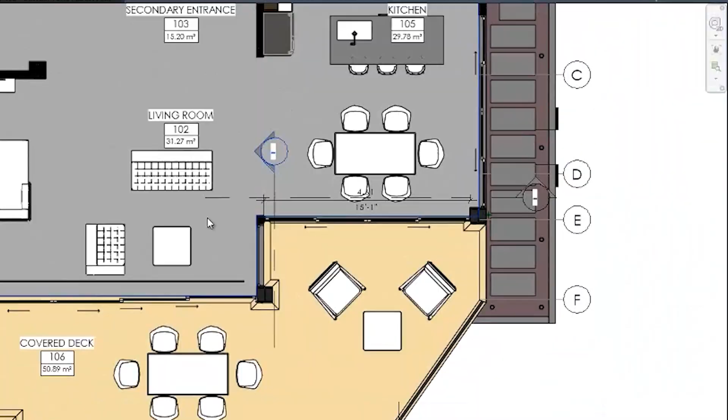At this point, the house works, but now we need to give it character, emotion, textures, colors, the soul of the project. Because, like I said in previous videos, what I sell is not drawings, designs, or 3D models. What I sell is the final experience of living in one of my designs. And remember, finishes are not decoration, finishes are architectural decisions.

This is the step where many people go wrong. They start with tiles, kitchen, and Pinterest images before the volumes, proportion, colors, and light are correct. In my process, finishes come after the client has validated and approved the conceptual proposal, never before. And this is exactly why working with an architect who understands the tropics or the tropical weather saves you money long term.

So once the conceptualization stage is approved, I move directly to the 3D model. In this 3D model, I work with my team in order to create a very detailed 3D model with all the characteristics, the textures, the colors, the proportions, the materials, everything according to my client's vision, necessities, and obviously budget. So let's move to my computer.

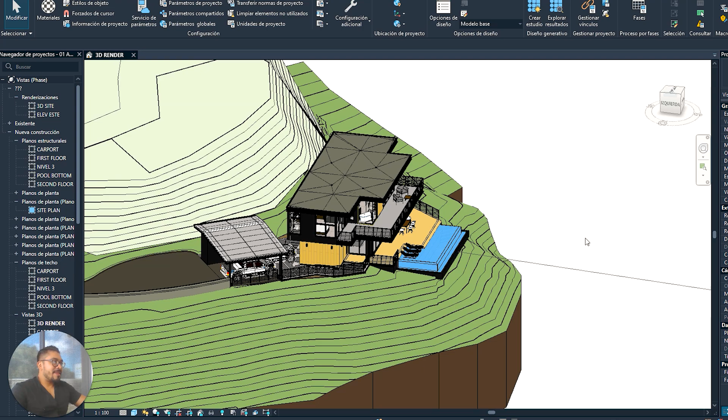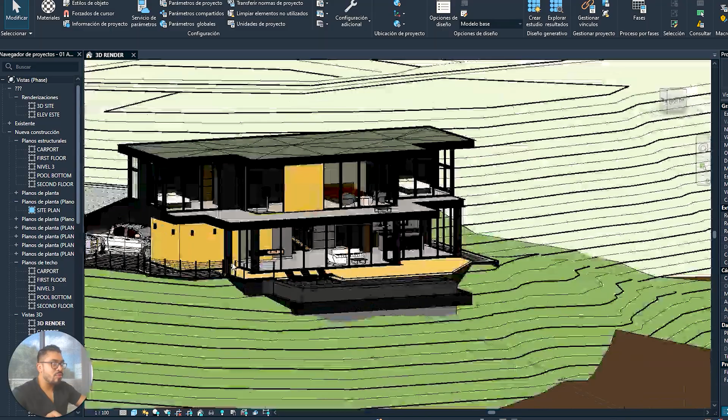Okay guys, this is the final 3D proposal of my project in Pacific Marlin. As you can see, the model is finished. We were working on proportion, obviously. So you can see that the project looks proportional based on the size of the pool, the height of the ceilings, the height of the stories, the carport area, and based on the length of the project.

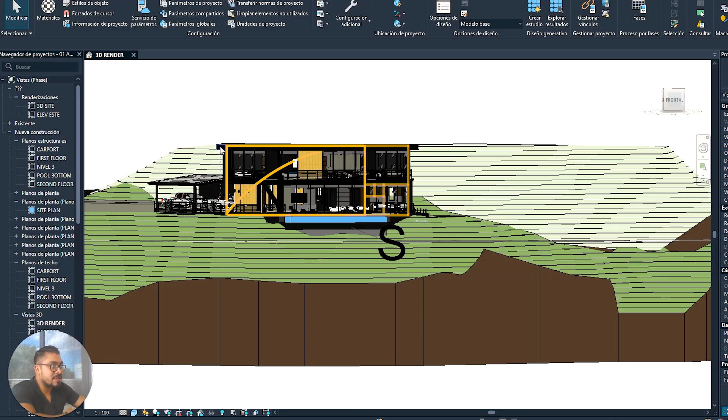To get this proportion, I use the golden ratio. I use a rectangle and this point, the angle or the point of this vertex, and I use the same height. This way, I'm pretty sure that it's going to be proportional for our eyes. The perception of the house is going to feel proportional and comfortable. For that reason, I really love to use the golden ratio. I learned this from architecture school and also from the other legendary architects. So, I'm just applying this to a modern age.

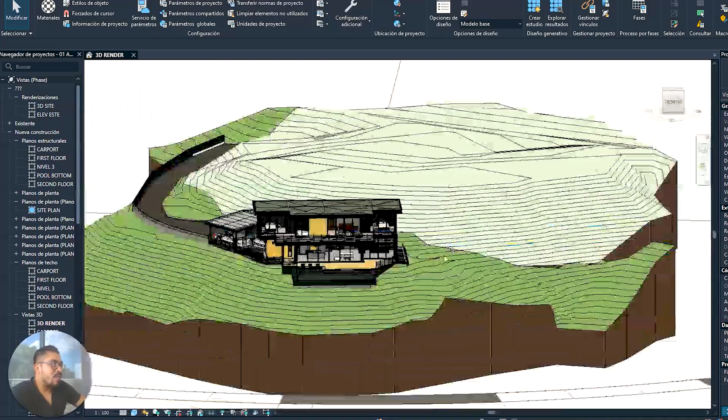I study the shadows as well in this 3D model, the final 3D model. I just turn on the sun exposure, and as you can see, we have a really nice shaded area inside the house. For that reason, I really love to use this tool.

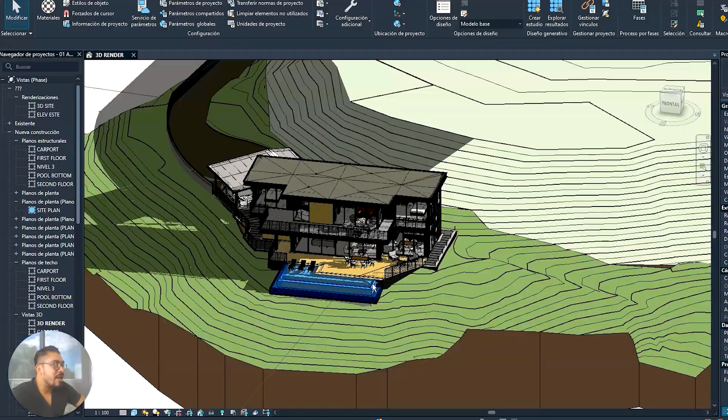I have the exact geographic point, San Juan del Sur, Nicaragua. And in order to have a shaded area most of the time during the day, obviously, when I'm in the sunset hour, approximately 5 p.m. or something like that, we will enjoy still a shaded area, but we will enjoy also the golden hour. That's really amazing. I really love to enjoy the sunset in San Juan del Sur. This is a nice experience that you need to feel.

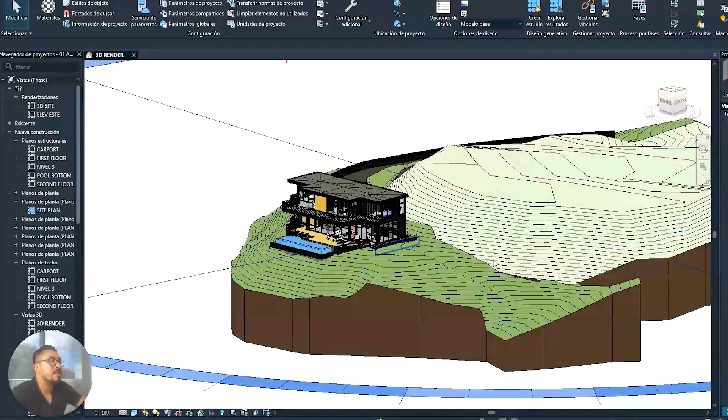For that reason, this is the final 3D model, because based on those calculations, I determined the length of the balcony, which is an overhang at the same time. As you can see, it's a really nice overhang.

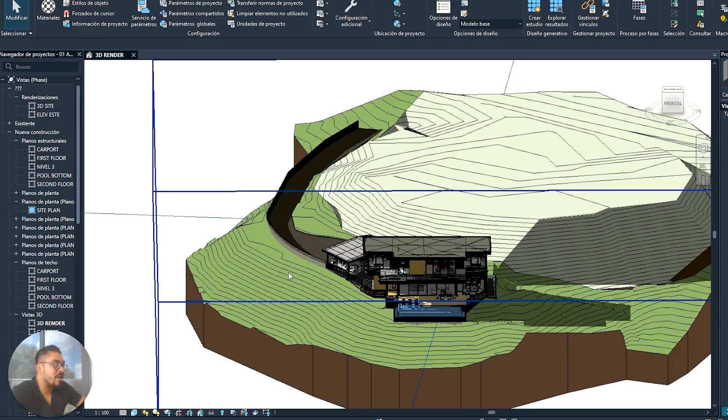Also, I turned off the trees that were here to have a better perspective of the 3D model. But yeah, we have a lot of neem trees over here, which allows you to have a shaded area as well. Please don't cut trees. Use them as an architectural tool as well.

But again, when my clients are enjoying the sunset on the second story, they will see or they will enjoy a really nice view towards the sunset, the golden hour here.

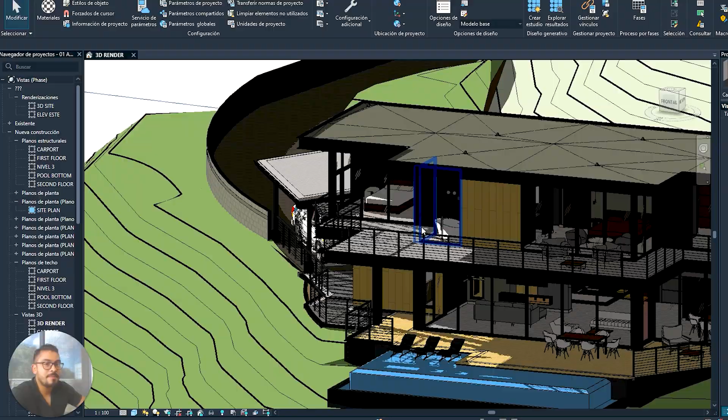Okay, that's really amazing, even if they are using the bathtub area. So I have calculated the exact length of the balcony based on that.

As you know from previous videos, this balcony or deck is pointing directly to the San Juan del Sur Bay, so they can have a really nice sunrise breakfast together. Yeah, that is going to be amazing. I promise you a video on that place once the house is built.

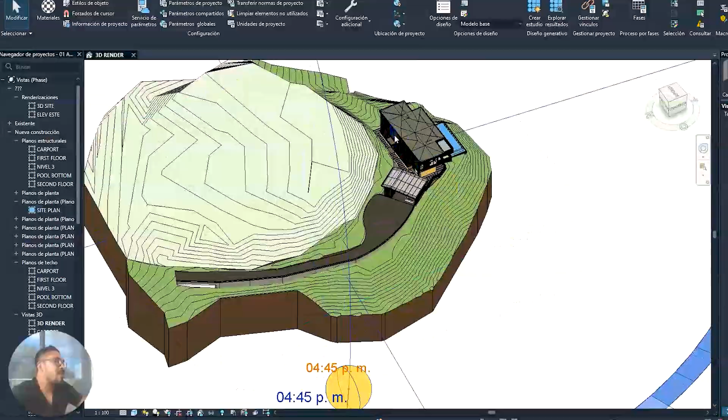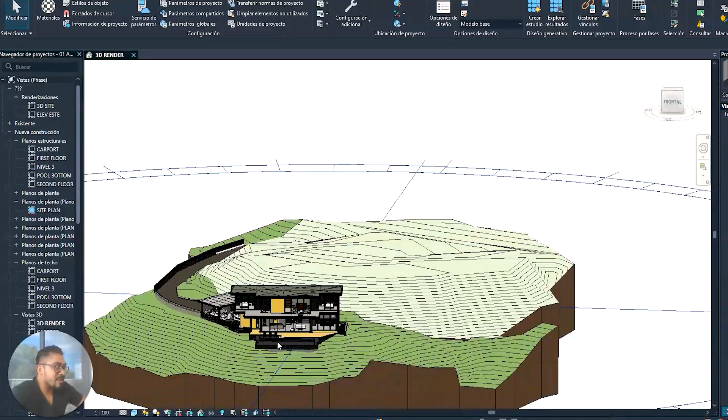As you can see, we have a garden here, an open space, and a mountain in the back. This area is going to provide cross ventilation. The length of the house is in this direction, so the wind coming from this direction will allow a very good cross ventilation using these panoramic doors. That's really important. We also have wind or breeze coming directly from the ocean, and the pool is going to be cooling that air as well. That's a really interesting effect, and we need to take advantage of everything.

Now let's talk about finishes, colors, and textures. As you can see, this is another view of the house. This is a software I use to make renderings for a realistic look, so the client can see in real time how the house is going to look. I really love this software.

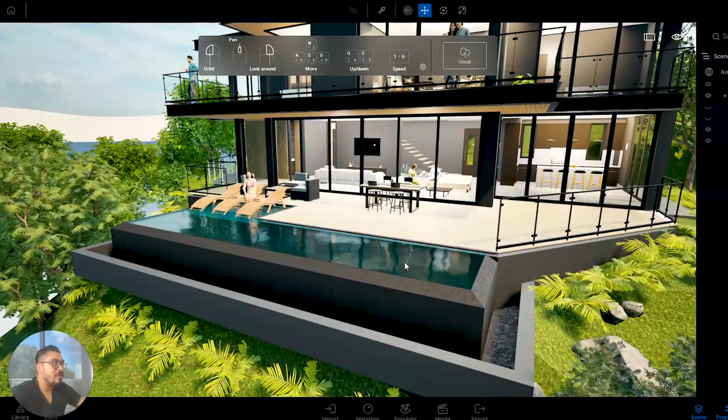So this is an infinity pool. As you can see, we are using a smooth material called Diamond Brite, and I have selected the onyx color, which is a darker color, in order to have a more contemporary look, because this is a contemporary architectural style, and they wanted to avoid white. They wanted to have a different house in that spot of San Juan del Sur.

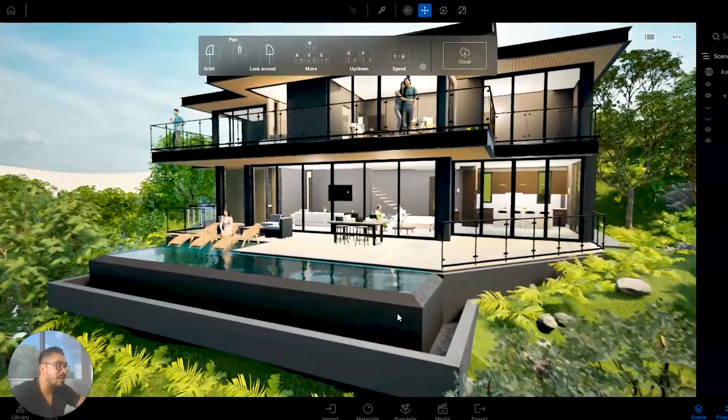So it's a really nice look. This is an infinity pool, like I said, with an infinity effect all around it, like a C shape. So all the water is going to be dropping here in the infinity effect once the pump is turned on, obviously. We are using a gray color paint for the very front of the infinity effect.

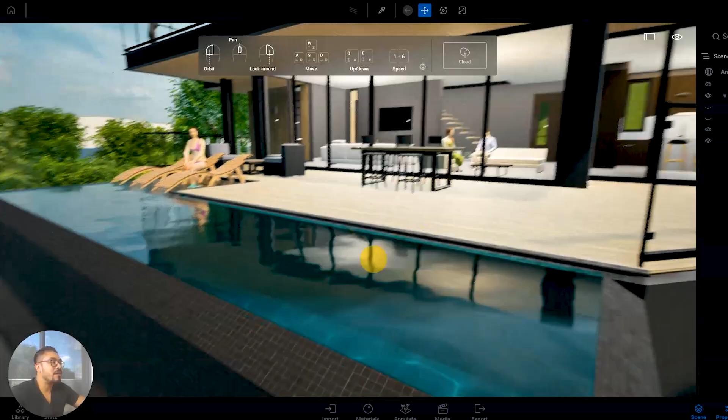As you know, this is monolithic concrete, and the pool itself is the retaining wall of the house. This is going to be a concrete plus rebar wall, and we need to go deeper, maybe 3 or 4 meters, based on the soil study. Everything is onyx, black color. The effect is going to look amazing, and we have 4 feet depth for the swimming area.

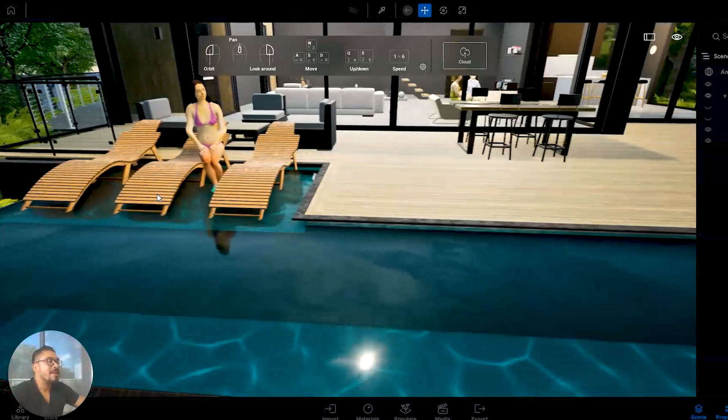Then we have a shallow area to put chairs and enjoy the sun at the same time, because this is the sunbath deck. We don't have a roof in this direction, in this part of the house, just here.

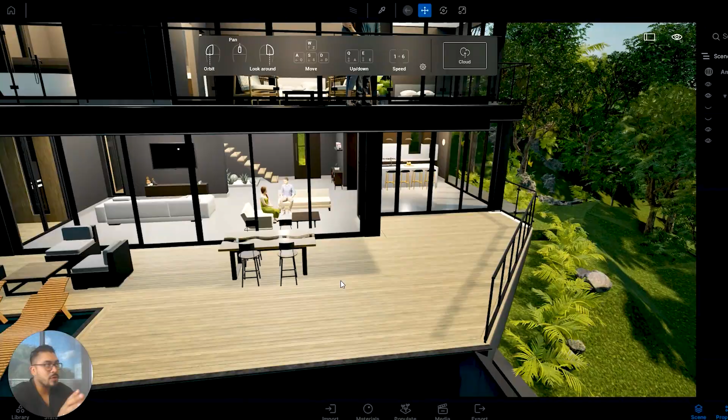Talking about finishes, as you know we have a fixed budget, so I was proposing this fiber cement wooden deck look. It's not wood, it's a fiber cement material with the appearance of wood. So we are saving money and we have the look of wood at the same time. This is cheaper, but it is functional as well.

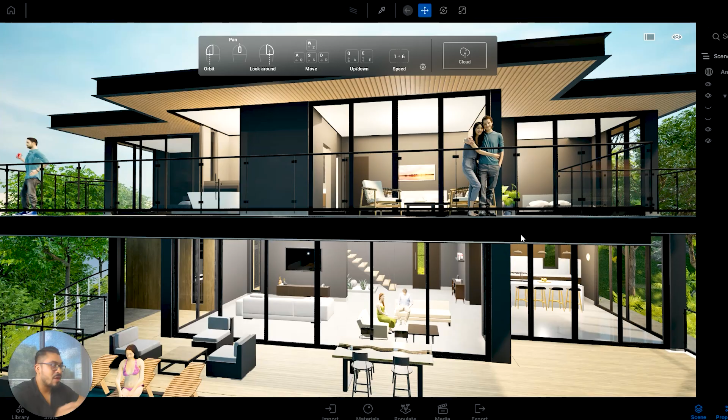We are using this tone to balance and make contrast with the black color, because the PVC sliding doors, the windows, and the fascia, which is a metal fascia, are black, and the interiors use gray tones. So I decided to use a light wooden color for the pool deck.

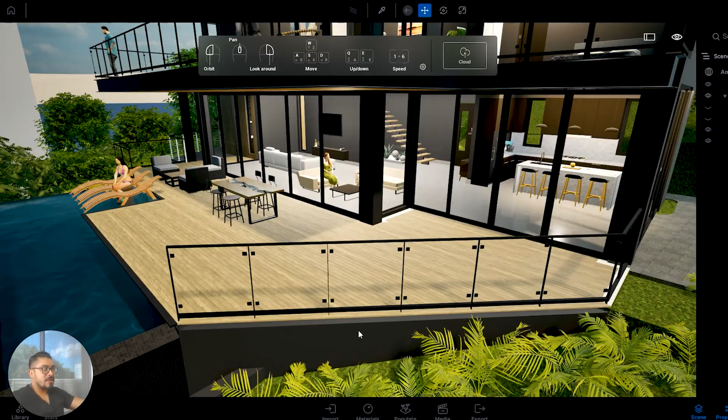All this is a metal structure, and these little retaining walls are cinder blocks with rebar in the middle of the cells, and we are going to pour concrete on it. This way we are using a less expensive retaining wall. Where we need to use 100% a monolithic wall is in this area, because the pool is responsible for it.

You know, the water is really heavy.

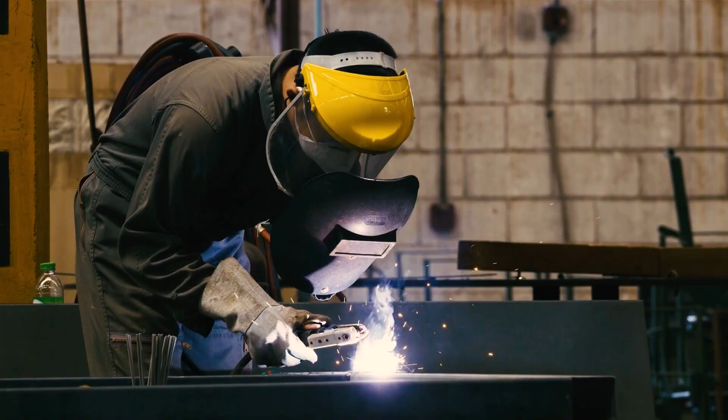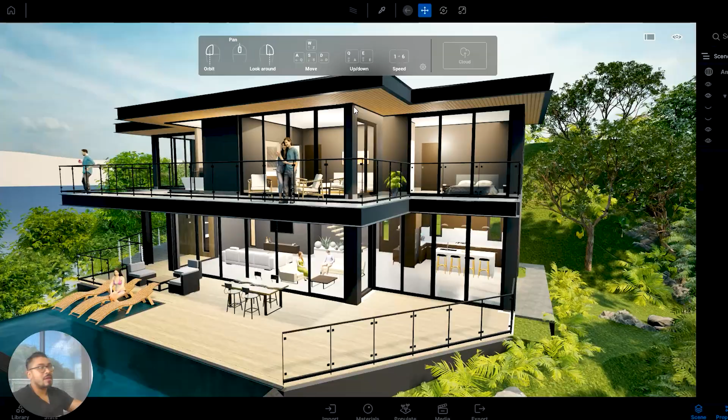Regarding the structure of the house, we are using a metal structure. In the area where we have an important balcony or overhang, we need to use lighter materials, so the very front of the house uses Emmedue, which is nice against heat and also lighter. In the back of the house, we are using cinder block plus concrete structures, because this is the core of the house, which has the most responsible role structurally.

These columns are fake, we can say, because we are using metal columns inside, and we are just using a cover with fiber cement to keep the proportion. We need to take care of the proportions so we don't see a little column over there.

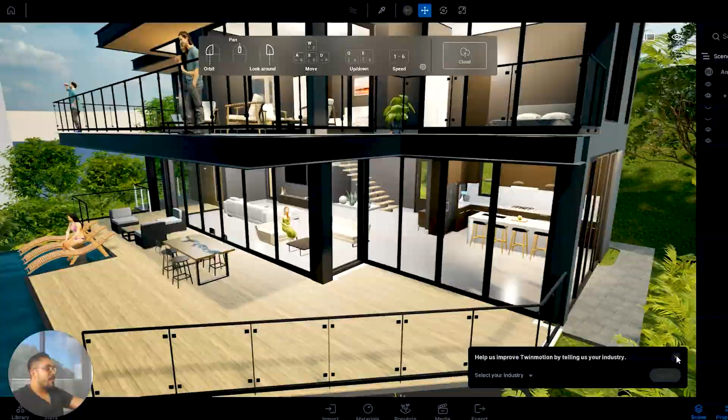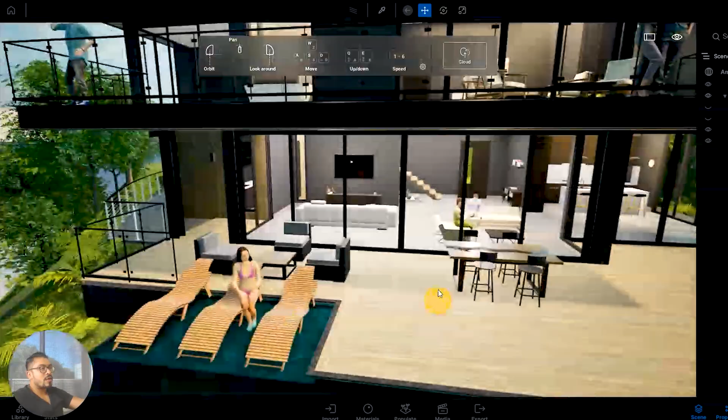In this direction, we have a sidewalk, especially for visitors of my clients, their friends, so they can park their pickups and go directly to the living area using this door, or go to the pool deck, the sunbath zone, or directly to the pool. Meanwhile, they are walking to the house, they enjoy the amazing view from this viewpoint. That experience is really important to me.

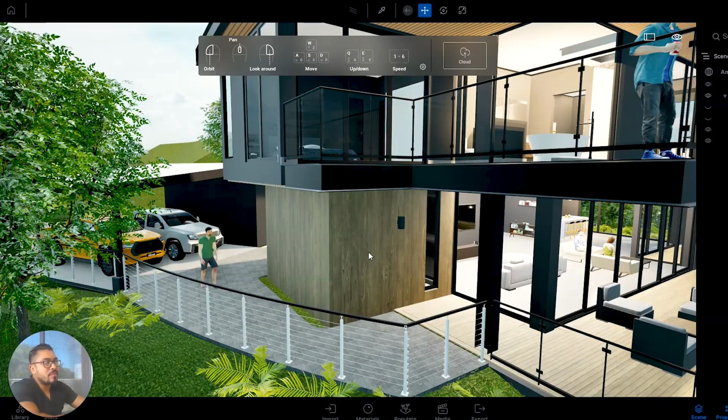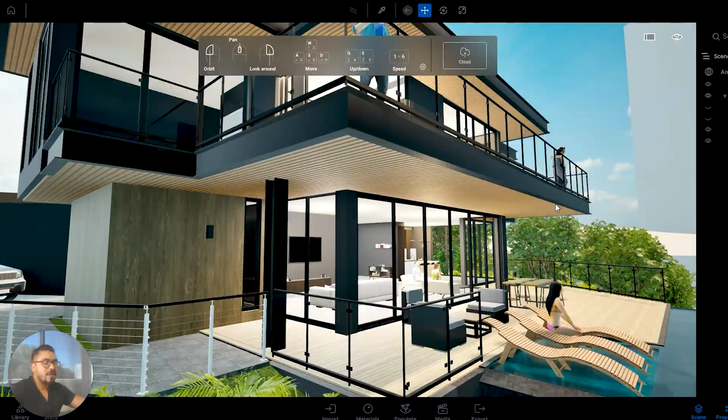For the ceiling, we are using natural wood because we need to balance things. We are using cedar wood and applying the same stain color. We need to create a special maintenance plan to protect this wood every 3 or 6 months, depending on the type of wood. I think cedar can resist 6 months.

We are using a glass railing as well because we need to enjoy the view from everywhere. We have a really nice 270 degree panoramic view towards the ocean, towards San Juan del Sur. This house is designed for a young couple, so it's really open to the nature, to the ocean. They need to feel happiness here.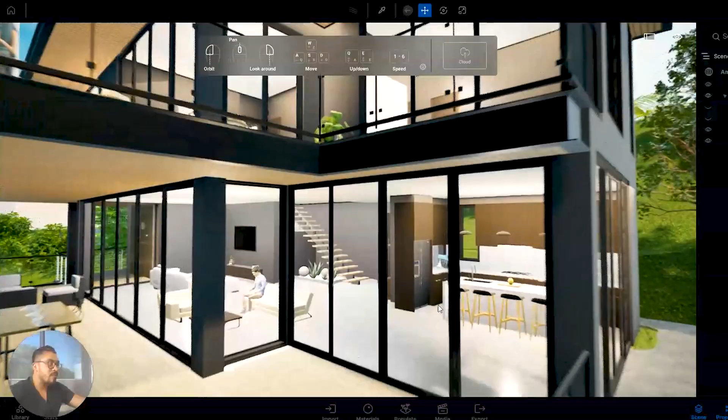Inside the house, we have polished concrete with natural color. This way we are saving money, but at the same time it's a really modern flooring look.

Also, we have the staircase. We are using a metal structure in the middle, metal plates for the steps, and then we are adding the wood on top using screws. This way gives a really nice wooden look while avoiding costly materials.

We decided not to use a glass railing here. We are just using this cable system, because it could be dangerous if you were enjoying wine in town and want to go to the master suite after a really nice night party.

Underneath we have a really nice garden, which is important to keep the natural sense of the project. And over here we have a powder room, a half bath.

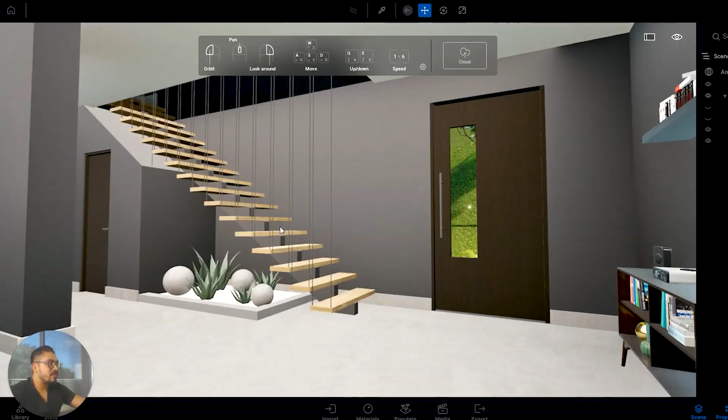For the internal walls, we are using drywall or fiber cement walls, depending if we are in a dry zone or a humid zone. We are using solid wood for all the doors because it's a high-end house. Don't forget that. And then we have here the kitchen.

We have designed a really nice island because they love cooking while enjoying the San Juan del Sur town. We are using countertops, which we can select based on our catalogs. I have a ton of catalogs here in our architectural studio.

I think the best practice is to go with my clients to the finishes store to select everything. I love that part. The emotion of selecting the final finishes of your home is something you need to experience yourself.

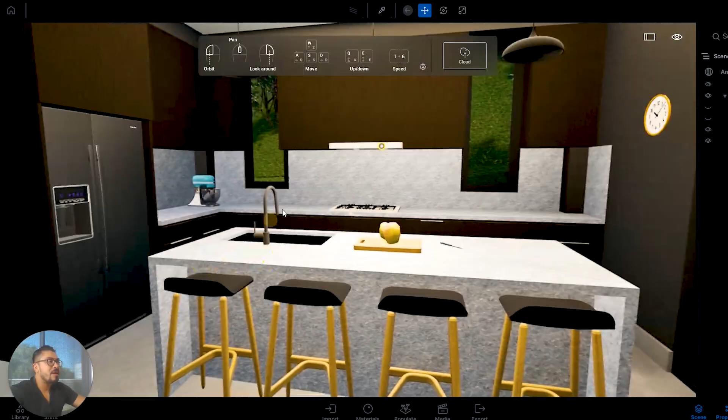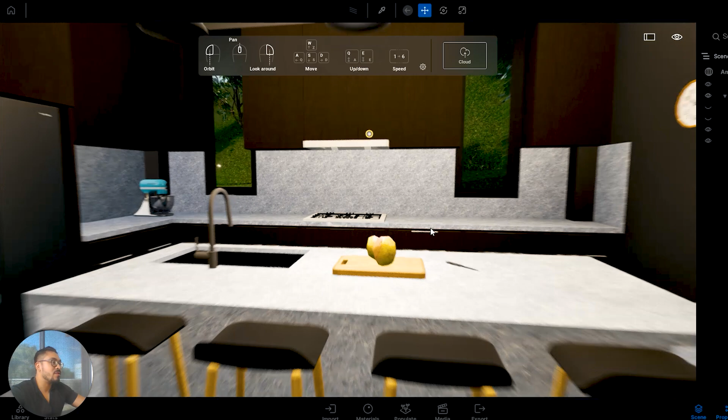So we have a sink area, with the backsplash using the same countertop color. We have a 36 inch fridge, and we're using a darker wood here for the cabinetry, and obviously we have windows. That's very important for good illumination while you're cooking your best plates. We also have a lot of cabinetry, which is really important so you can store all the bowls, plates, spoons, forks, etc.

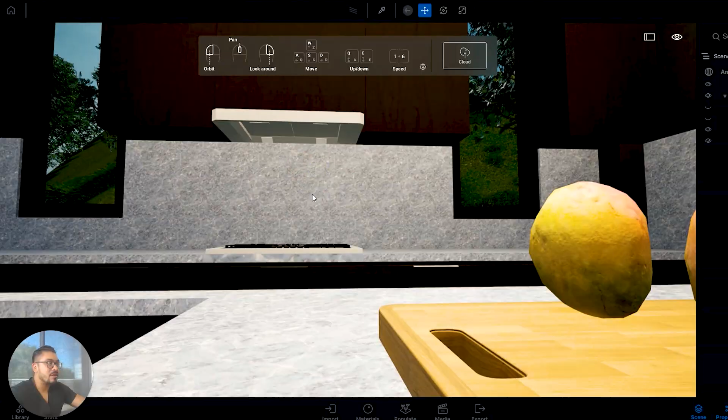Then we have the cooktop, and the hood is hidden, as you can see, because this is a contemporary look, so we need to keep the simplicity as much as possible. We have the ceiling in the interior, which is drywall with white color, and we need to keep a contrast. It's very important, so as you can see, the floor is lighter than the walls, or you can decide to make the walls lighter and the floor darker.

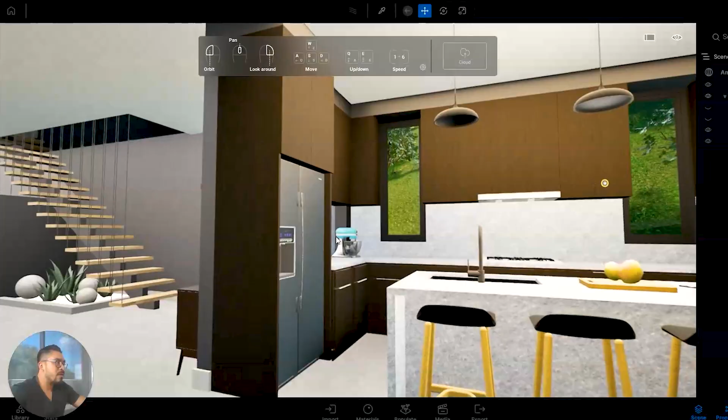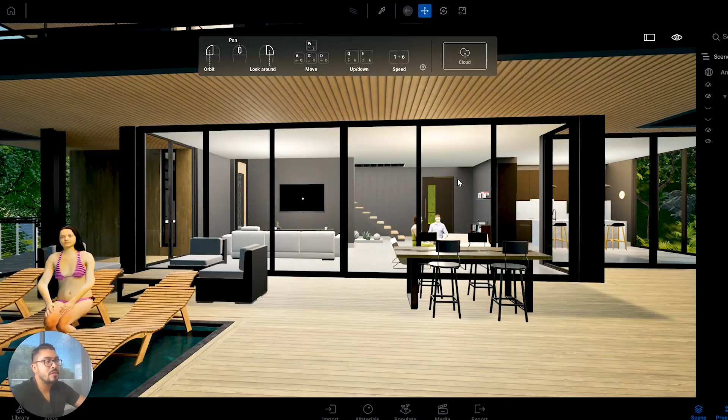That's acceptable as well, but yeah, this is practically the finishes for the living area. We're using a darker wood color as well to make contrast, matching with the color of the doors and the furniture. I love to use floating effect furniture to keep the consistency of the contemporary style. Even the frames of the PVC windows and doors are jet black - that's the code of the black color.

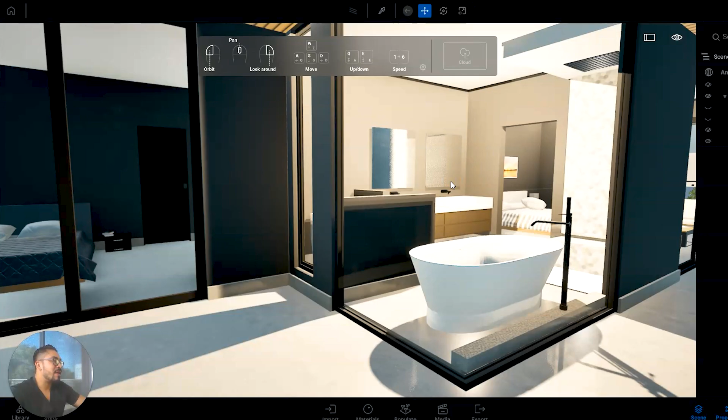So we're using the same color for the interiors of the bedrooms. This is the master suite, this is secondary bedroom number one, and this is secondary bedroom number two, and also the master bathroom area. This is the 3D model.

For the fascia, I'm using a metal fascia to keep the contemporary look, using a special paint against the salt of the ocean. We need to keep a maintenance plan as well - every 6 months we need to apply that special paint.

If we use a metal roof like the zinc, we need to create a slope, and the minimum slope for a metal roof is 10%. So we would need a bigger fascia, which would be incorrect for this type of project. We're keeping the straight lines - that's really, really important.

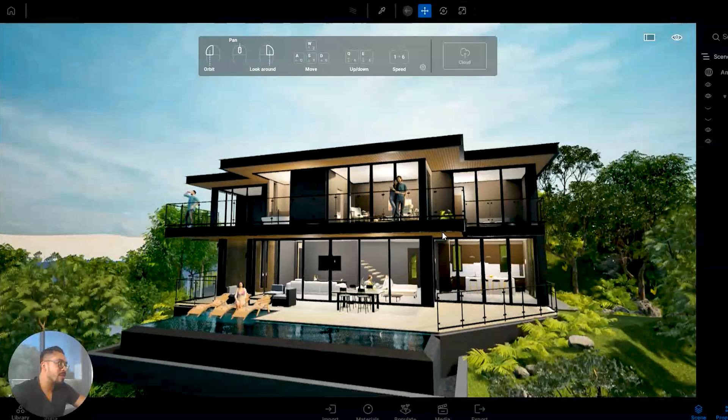But yeah, now let's move to the renderings. We're happy with the 3D modeling, so we move towards the renderings stage. As you can see, these are the final renderings of the house.

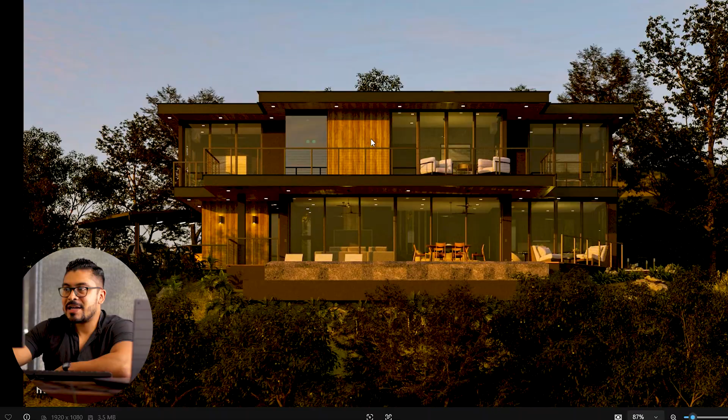We decided to apply the same siding wooden style like this one in the laundry and pantry room. This is really nice because we're balancing the textures. That's very important - I always stay with my team in a designing meeting, comparing and analyzing everything.

Okay, put this color over here. Okay, I don't like it, remove that. And that's my everyday here in the studio with my team - they are amazing, the best dream team ever for architecture.

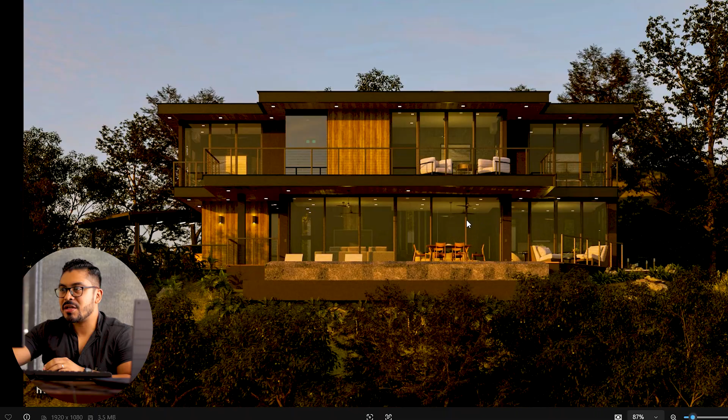So this way we achieve this nice concept, this nice result. As you can see here, we can see the wooden ceiling look - that's really amazing, that's really important for us. And this is the look for the other side of the house.

As you know, on the beach front is where we need to have the best facade, so in the back we can use fewer materials - only the clients are going to see it, so there's no problem if we leave this simpler, I mean the back of the house.

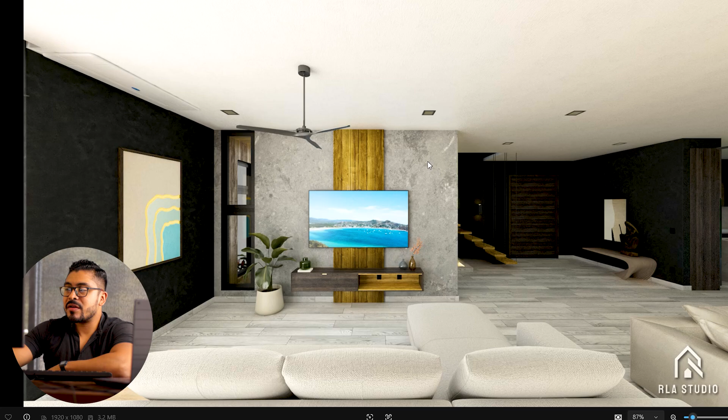This is the final look of the house, and for the interiors, these are the final finishes. As you can see, I made a lot of changes here. We decided to use the same siding look from the exterior to the interior in the middle to have a symmetry, and also we decided to play with the gray tones.

For example, the wall on my left is totally black, and the wall in the middle where the TV is going to be is micro cement, a different color, and also the texture, as you know, is rustic. This looks much better, and also the floating effect furniture is nice, combined with plants and little touches.

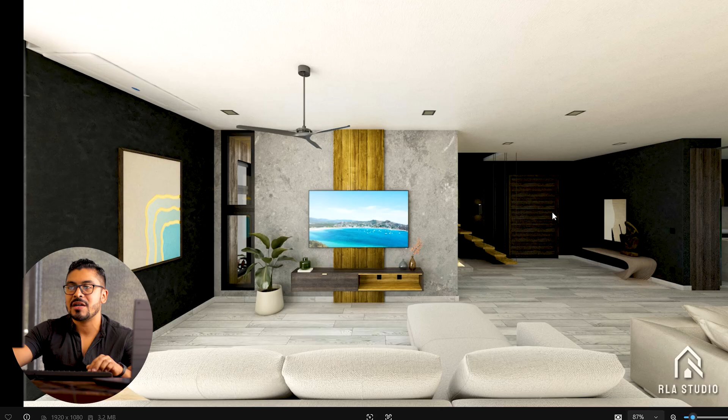We changed the design of the main door because this is the main door for my clients, and let me explain. For example, they are coming from town buying their groceries, and they don't want to bother their visitors here in the social area, so they can go directly to the pantry slash laundry, or go directly to the staircase and upstairs to the master suite. So that's very important for me, the experience, remember.

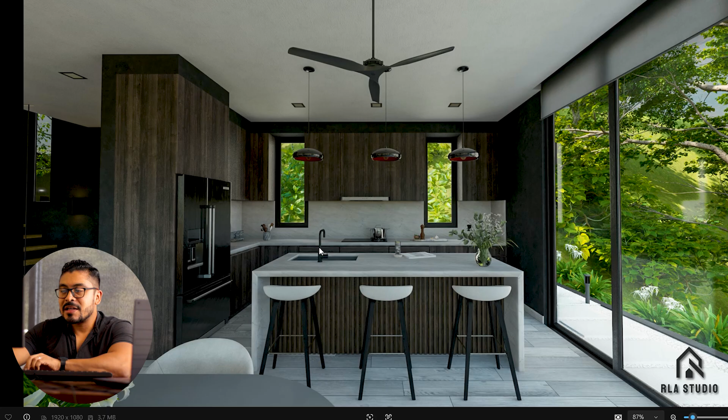So this is the final look of the kitchen. We decided to use another type of wood over here to make contrast again with the countertop and the backsplash. The curtains and the lighting features match the rest of the house, I mean black color, gray tones sometimes. Even the faucet of the sink is black, and this is going to be the beautiful view that my clients are going to be enjoying every day. It's a really nice view, unbeatable. I can say this is one of the best views where I have designed a house.

And this is the master bathroom with a bathtub area. I love to use this type of window with no frame in the corner. This way you can enjoy the best experience. We have a glass panel over here because we have a rain shower, so we need to avoid the splashing water reaching this side of the bathtub area.

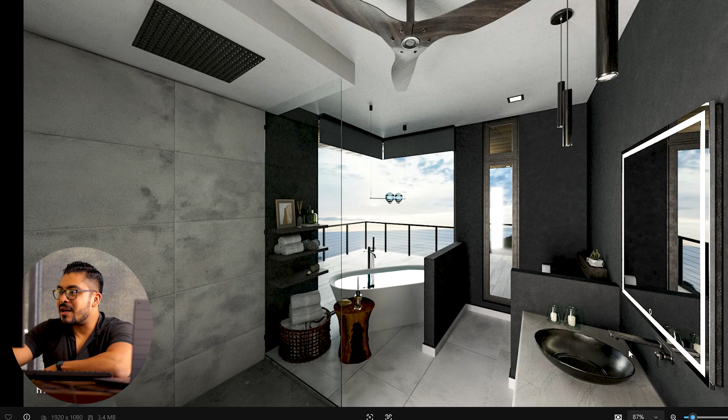And also, as you can see, we are using big format gray tone tiles; those are trending right now. I know this is a contemporary design, but at the same time I love to use rustic touches, like this bench or this basket for the towels. The ceiling fan right here has a wooden look, and I love the wall mounted faucet for the sinks as well.

This is the toilet area, and we have the master bathroom. We can go to the walk-in closet on my left, or if you prefer, go to the master bathroom over here using this opening as well. We don't have doors here because I wanted to keep that feeling of spaciousness for the master suite.

We also have this really nice decoration with those fish. I love those pendant lights, that's really nice. And also this is a king size bed, but at the same time we have a coffee table and chairs over here.

Again, I was playing with the colors of the walls besides our black color, but the wall in the middle uses the micro cement with that rustic texture, and also the white color drywall ceiling.

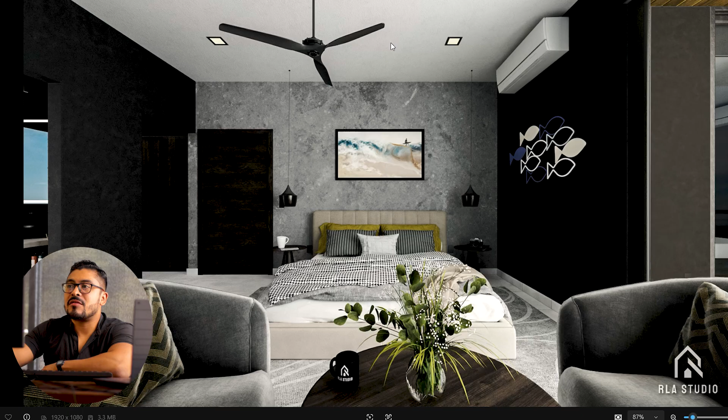Okay, and this is again the master bathroom. Like I said, we don't have doors here, just an opening to go directly to the master bathroom. We have the toilet, and as you can see, I love to use these contemporary squared toilets, and the floating effect for the furniture.

That's very interesting. Again, I'm using the same countertop for the whole house, I think we are saving money and avoiding mistakes with the contractor. I love the pendant lights as well. I really love this style, which is minimalist, contemporary, modern.

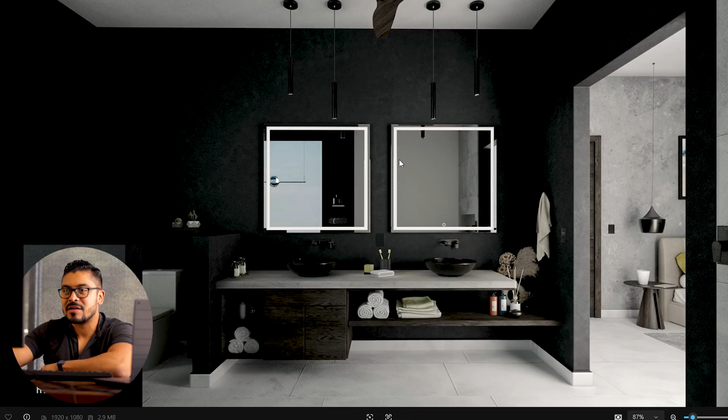And this is the secondary bedroom on the right. The visitor who is going to be enjoying the house in this spot is going to be enjoying at the same time the sunset. That's really, really amazing.

And this is the balcony, okay, coming from the master suite. Like I said, the trees are lower than the master balcony, so they can enjoy a better view.

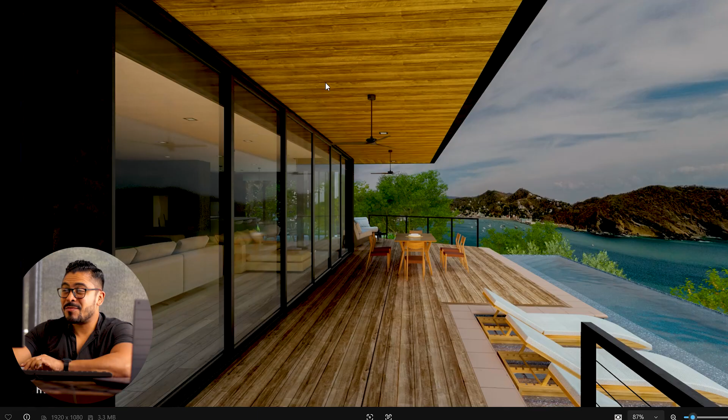This is the view coming from the pool deck. We are using the fiber cement look, applying the wooden stain look. As you can see, we have a larger overhang to avoid direct sun exposure for the interiors. This is the infinity pool. Once you are here, you can see how the pool is combined with the ocean, and that's really, really nice.

When my team and I propose finishes to my client, at the end of the day it's your decision as a client which finishes you are going to use. You need to think about durability, sun exposure, and proximity to the salt. In this era of globalization, human beings have developed options to protect these materials—special sealants for wood, special paint for metal—for structures close to the ocean, where salt can cause harm.

We have other alternatives, because in the past, people building a beach house practically just used wood, palm roof, or castilla cane, something like that. Nowadays we can still use those materials, but applying the right sealant and the right extra protections.

Again, as you can see, this is a modern house with a lot of glass, similar to a European home. But we cannot replicate the same layout and designs from Europe in Nicaragua's reality. What we've done, as shown in the previous explanation, is use extended overhangs, different colors, and different materials to adapt that architecture style to Nicaragua's reality.

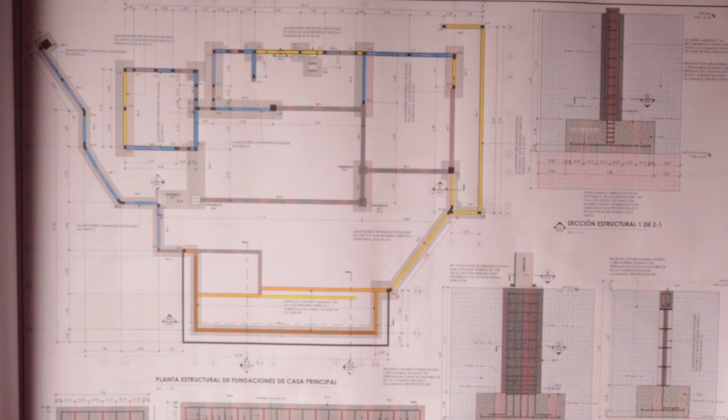In the next episode, I'm going to show you the final construction drawings, the technical drawings that I provide to my clients to ensure success with the construction. This way, the contractor has all the tools, documents, technical support, and documentation to carry out the beach home construction. Building a beach house is not about copying images from Pinterest—it's about process.